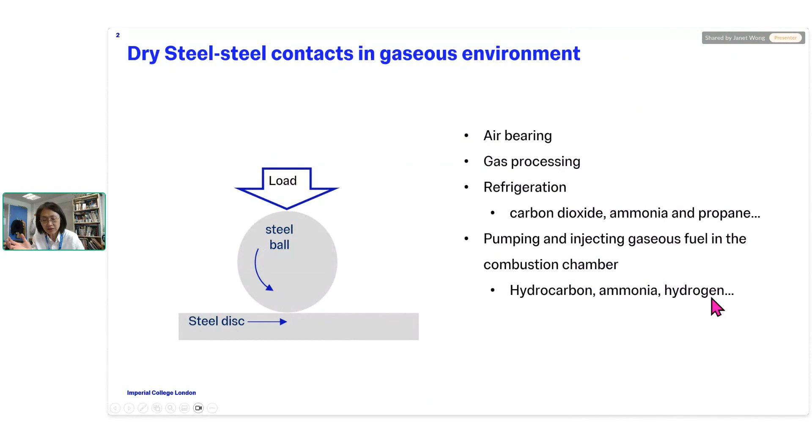A lot of us here probably are familiar with the use of lubricant to reduce friction and wear in tribological contact. In some cases, the use of oil is not suitable. Perhaps you're worried about contamination, or your operating condition is of high temperature. So in those cases, you might choose to have the contact in dry condition.

However, even in the case of dry condition, chances are it's not like there's nothing around the contact. A lot of the time, there will be gas around it. It can be air, or you can have your contacts in an encapsulated condition in nitrogen or in argon. But in all those cases, there is a chance that all these gaseous molecules could potentially interact with the surfaces, so we need to understand how this interaction potentially affects the tribology of our contact.

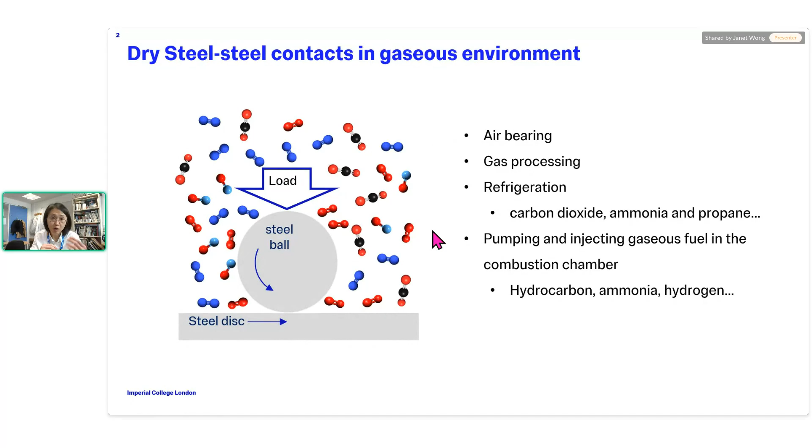So here is just some examples of why the gas environment may be important for tribology. For example, you might be dealing with air bearings, or you are in gas processing. Refrigeration is obviously an important scenario for that. And some of us here may be looking into the use of hydrogen and ammonia for internal combustion engines. In those cases, again, the effect of gas and its interaction with the surface is of importance when we care about the tribology of this contact.

So the study of how gas interacts with surfaces is not new, it has been around for a while, especially if you talk about gases such as oxygen and dry air. Obviously, if you are focusing on steel, we all understand why air and oxygen is important, because you create oxide as a result of that. So the literature has shown that, depending on the oxygen content, your steel contact could have better or worse friction and wear, but it also depends on the material property of the steel as well. For example, hardness is one important property to consider.

Other gases, for example inert gases, have been studied a lot. For example argon and helium—most of the work has shown that they are not beneficial in terms of reducing friction. Hydrogen is also one gas that has some study, and because of the reducing nature of hydrogen, most work has shown that hydrogen is not good for friction and wear.

In terms of nitrogen, some work shows some reduction in friction and wear. There is some speculation that it is because of the production of nitride on metal surfaces in a nitrogen environment, but the evidence here is a little weak. That's basically a conjecture of why nitrogen could potentially be helpful.

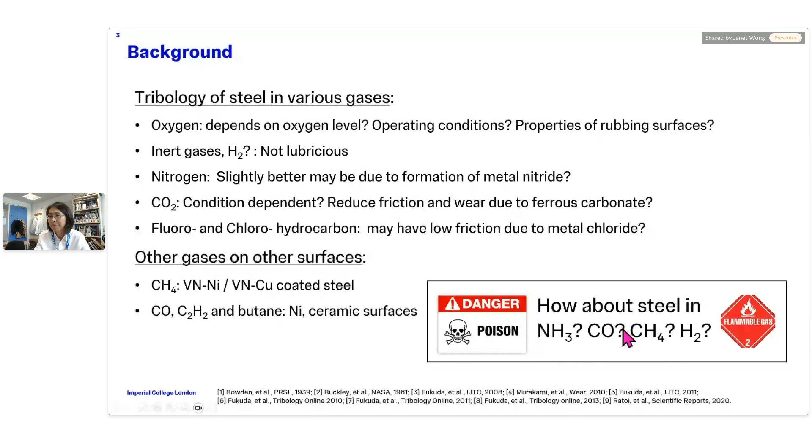So how are we going to run experiments on these gases so that we have a good understanding of how our contact would behave in this condition, but do it safely? Luckily, we work with PCS very closely, and when we spoke to PCS about what we want, they actually came up with a solution. The idea is actually quite simple.

They have a machine called the high frequency reciprocating rig. In a nutshell, what it involves is just a sphere in reciprocating motion, pressed and rubbed against a flat disc. With this contact, what happens now is that we put this in a stainless steel enclosure.

This stainless steel enclosure basically allows us to inject gas into the barrel, to make sure that now the rubbing contact is completely submerged in the gas that we want it to experience.

The important thing here is that the vessel has an internal volume of only about 20 milliliters. So you can imagine that even if we're dealing with a relatively dangerous gas, the volume of gas we need to deal with is relatively small, and the whole machine is quite compact. We can put the machine into a fume hood, and we only need to deal with a very small amount of gas.

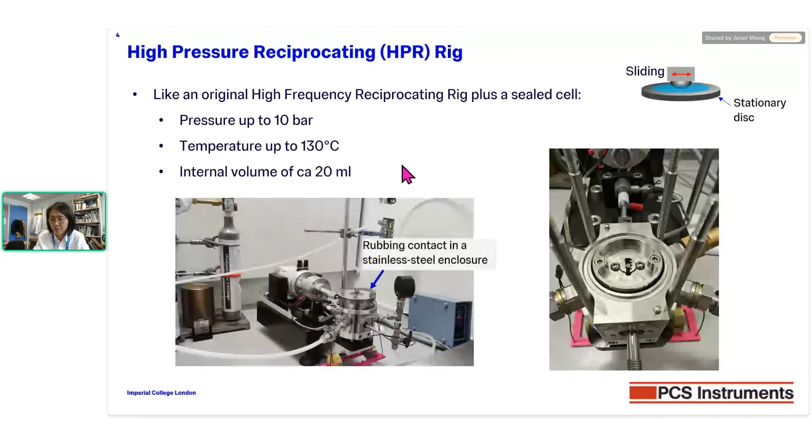That's actually what allows us to run these tests in hydrogen, ammonia, or methane relatively safely. This machine also allows us to run experiments up to 130 degrees and 10 bar. But for the results I'm going to show you, we're just going to do it at room condition—room temperature and 1 bar. So we are going to look at the effect of the gaseous environment on the tribological behavior of steel-steel contact.

So here is the test condition that we use. We try many gases here, because this is for us more like a scouting exercise to understand what gas is actually more beneficial and what gas isn't.

So I grouped the gas into two groups. The first group are the more conventional candidates: air and oxygen, with the inert gases nitrogen, which is relatively inert, and hydrogen, which is reducing. Then there are also some gases that we think potentially may be interesting, for example ammonia, carbon dioxide, and carbon monoxide.

The other group of gases here are all hydrocarbon gases. So you can see that here we have a group of saturated hydrocarbons, from very short chain - CH4 - all the way to a slightly longer chain. In this case we have 4 carbons, so you have 1, 2, 3, and 4 carbon chain length, and they are saturated.

And here we have hydrocarbons which are not saturated - unsaturated carbon. So we have this, which is a 2 carbon molecule but with 1 double bond. This is a 3 carbon molecule with 1 double bond, and then you have one which has a triple bond, but two carbons. So let's see how these gases behave.

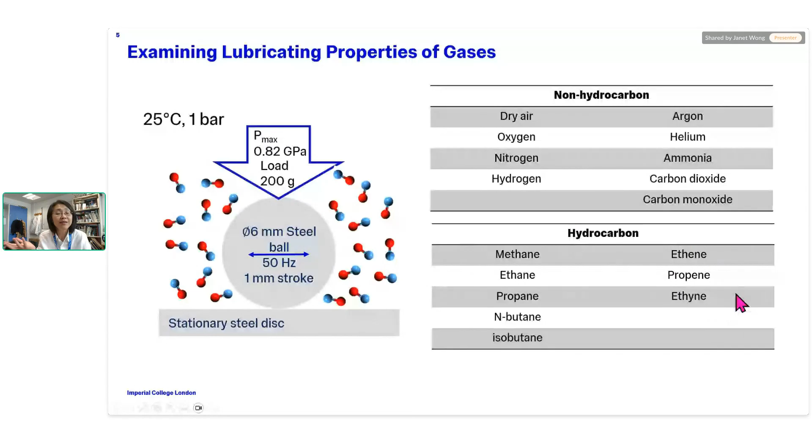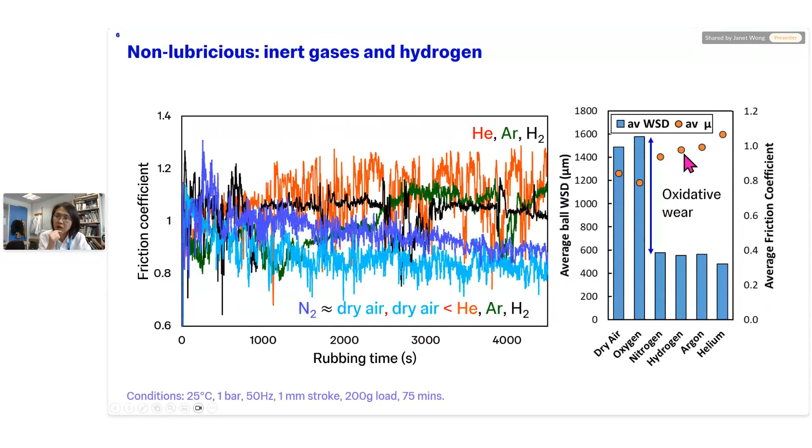If we look at the amount of wear, shown in the bar chart, let me explain what it's showing. The orange dot here is basically the friction coefficient, and the blue bar is the average wear scar on the ball. The larger the wear scar, the more severe the wear is.

You can see that all these gases have similar friction coefficient, but the ones with dry air and oxygen have slightly lower friction coefficient as shown in the graph. But for the wear, you can see that now for oxygen and dry air, you get much higher wear. That's basically what you would expect at high oxygen condition - you get much more severe oxidative wear. That's why, despite the fact that their friction coefficient is all around 0.8 to 1.2, when there is a large amount of oxygen, your wear is way more substantial compared to when you're in a more inert condition.

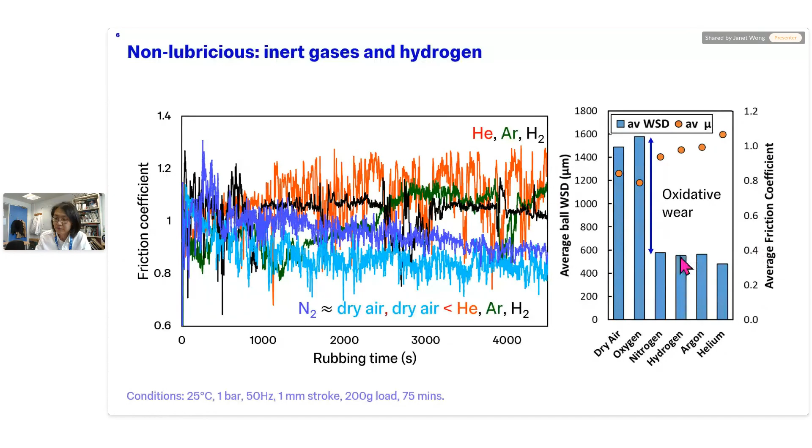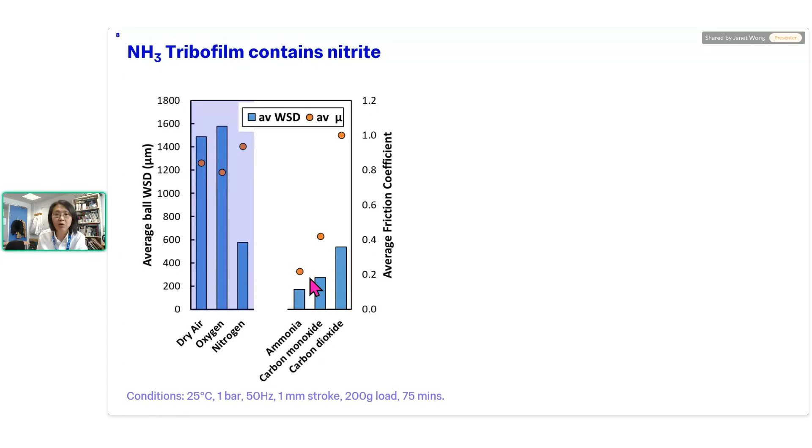So why? If you look at these numbers, it would have suggested that these gases must interact with the surface, potentially forming some protective film, and that's why we can have low friction and low wear. So what we did is perform XPS to find out what the chemistry on the surface is. This method allows us to look at the top 10 nanometers of the surface.

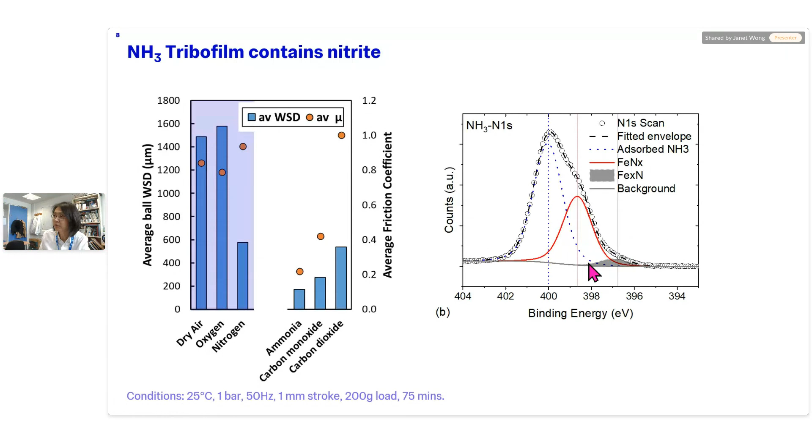So now that we have some idea that a film has formed on the steel surface when it's exposed to ammonia or carbon monoxide, perhaps you might wonder, how strong is this film? Is it going to stay forever, or is it sensitive to the environment it experiences?

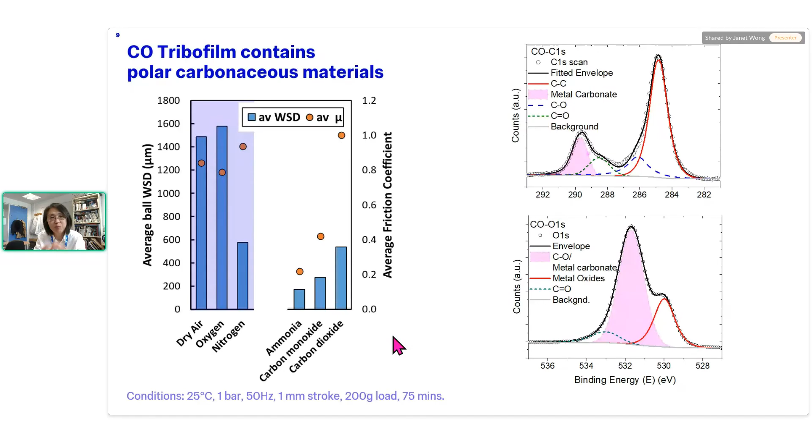So in order to find out how robust this film is, we're going to take advantage of the fact that HFRR has this chamber which only requires a very small amount of gas. So what do I mean by that? We are going to do a gas switching experiment.

Because the volume of gas necessary for HFRR is so small, that basically means I could flush the chamber with, let's say in this case, ammonia. And then once the friction is low, so I know the film has been formed already, then I can flush the chamber with nitrogen. And then I can see how the friction coefficient changes. The small volume involved means the switching takes about 10 seconds for the whole chamber to be completely flushed out of the original gas.

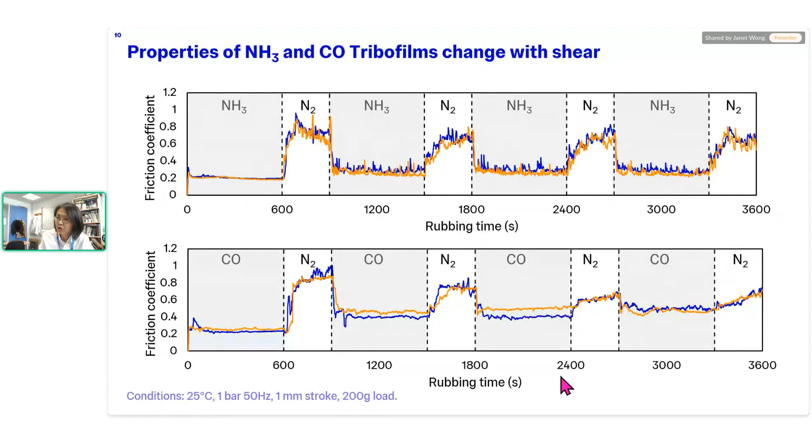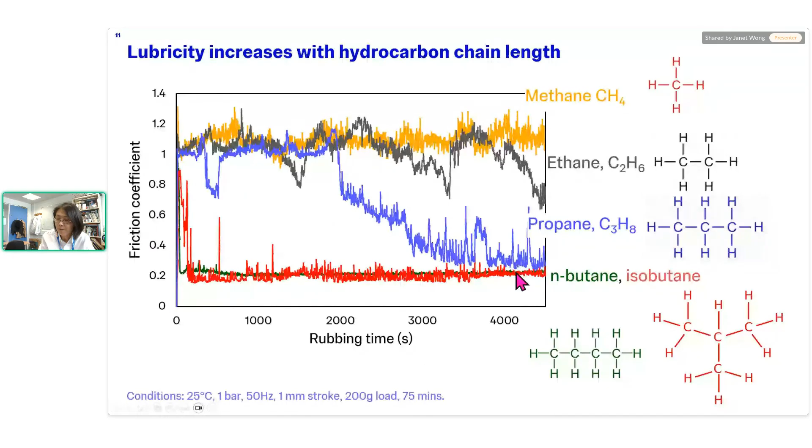And I think now with this trend, we can all guess what happened when we have 4 carbons. In the case of butane, we have tried 2 different structures. It really doesn't matter which structure you pick, both of them actually give very low friction coefficient, and the film forms very quickly. It takes less than 100 seconds for this film to form, and it is stable within the experimental time frame.

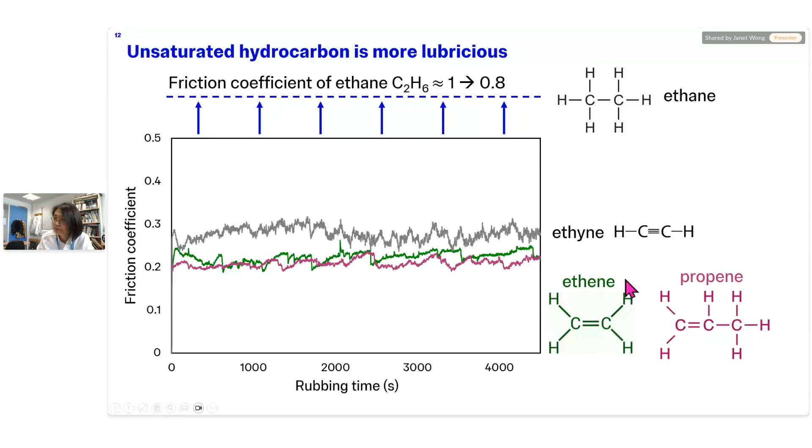For this particular film, it seems like it is good for friction. If we look at the wear for the few hydrocarbons we've tested, friction and wear seem to be correlated—those with low friction tend to also have lower wear. Here's the most interesting few: those that are unsaturated and those that are long-chain saturated hydrocarbons all have low friction and low wear.

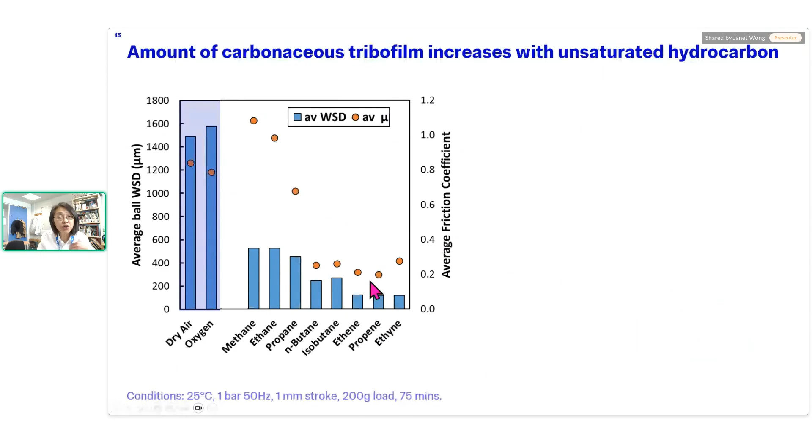So to have one hour of low friction, the film has to be formed and removed continuously during the whole rubbing process.

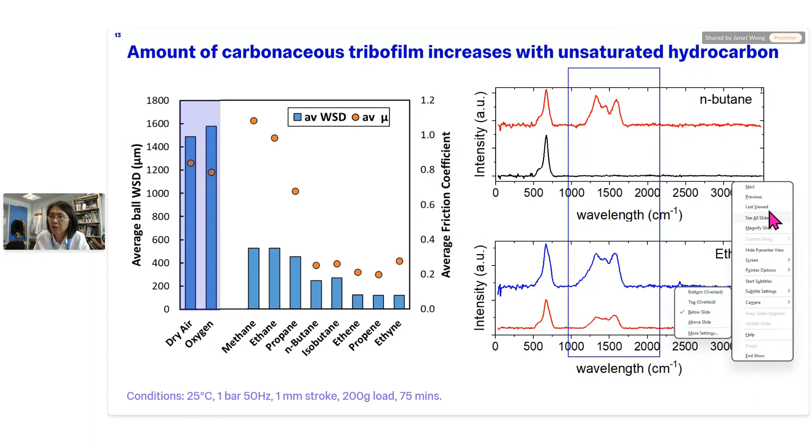So we're going to do the switching experiment again to work out the properties of this film. I'm sorry, it has frozen. Okay, so we're going to do the switching experiment again.

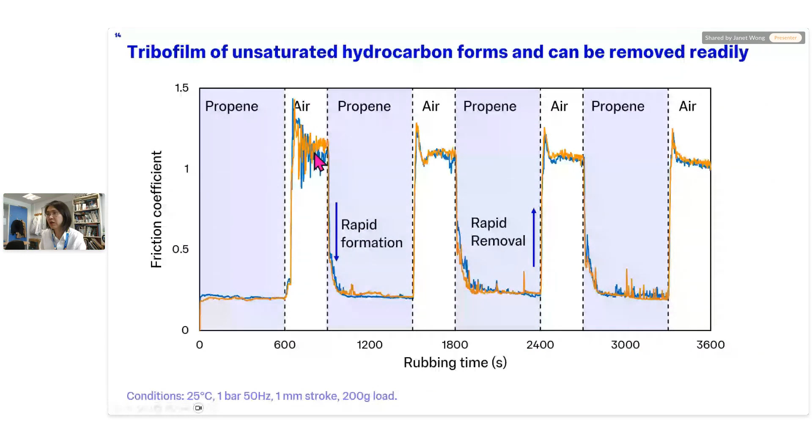It's almost like when this film is formed and exposed in nitrogen, it actually becomes stronger with time during rubbing. This suggests that, compared to the propene-air switching I just showed you, oxygen plays a very important role in removing this carbonaceous film formed in propene—and this matches what we found in our earlier work looking at hydrocarbon oil as well.

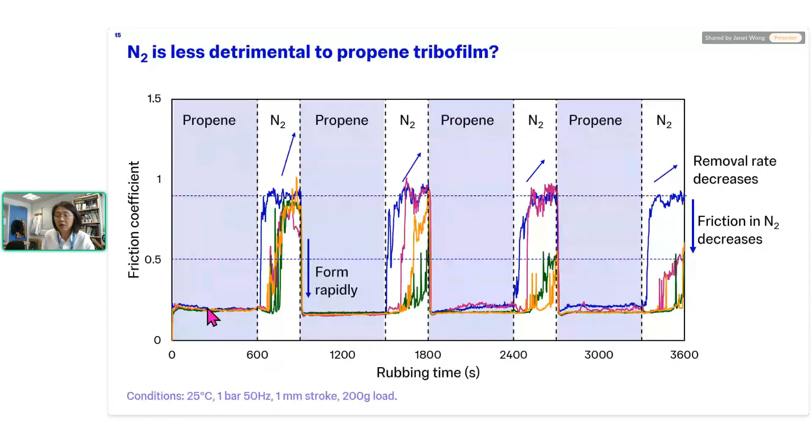I mean, maybe, but you may not want to do this. So how are we going to use this information? I'm going to show you an example of how we can use this information.

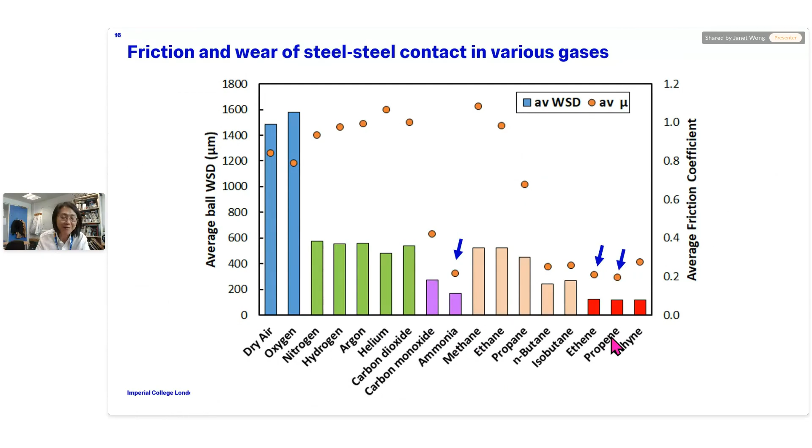We are going to use this knowledge from that piece of work on a scenario where our contact will see hydrogen. There's now a lot of work focusing on the use of hydrogen for IC engines. So here is an example of how it may look like, and in these cases, the pump and the injector will need to be lubricated.

We have shown you that hydrogen is actually not good in terms of steel-steel contact. We know that hydrogen gives very, very high friction. That basically means that if my contact is going to see hydrogen, I need to do something to reduce the friction, otherwise the pump will seize, and that's the end of the story. The previous work showed that some gases actually can be potentially lubricious.

So what if we could add a little bit of this lubricious gas into hydrogen so that it acts kind of like an additive? Therefore, my rubbing contact will work in hydrogen. So this idea of using gas as an additive is not new.

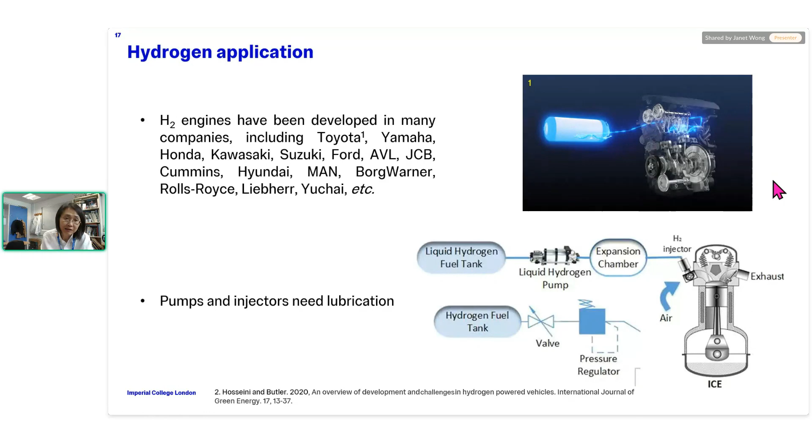This idea has been called a different name previously. Some of us may be aware of a lubrication strategy called vapor phase lubrication or gas phase lubrication. The idea is quite simple: you have a gaseous molecule that is lubricious, and you use a carrier gas to bring the lubricious additive to your contact.

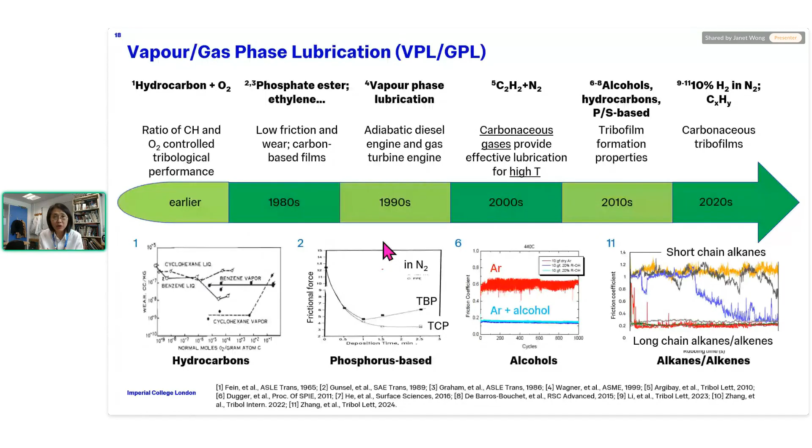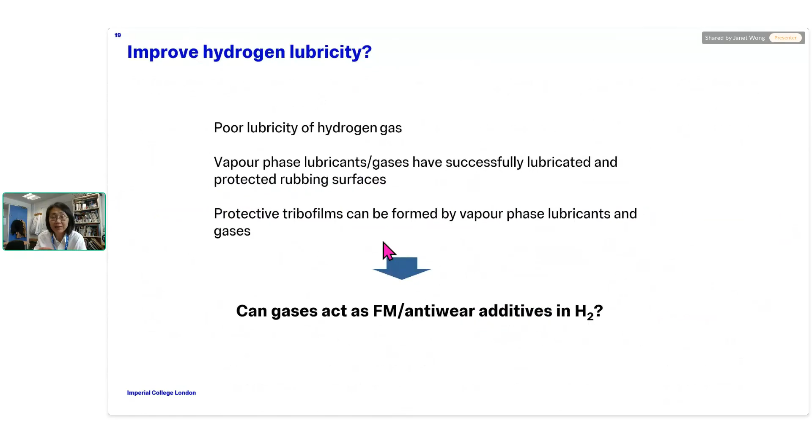So we would like to use this as an opportunity to find out if we can use a lubricious gas as an additive to lubricate contact that is surrounded by hydrogen.

So these are the gases that we try as the additive. The choice here is basically guided by the piece of work that I've just shown you. We already know that the unsaturated hydrocarbon works quite well. We have seen that ammonia possibly could work quite well.

Other choices, for example like the amine, we picked because we know that amine can interact with steel quite strongly based on our research on friction modifiers and stuff like that. And also it depends on whether we can find this easily. So anyway, these are the choice of additives that we tried.

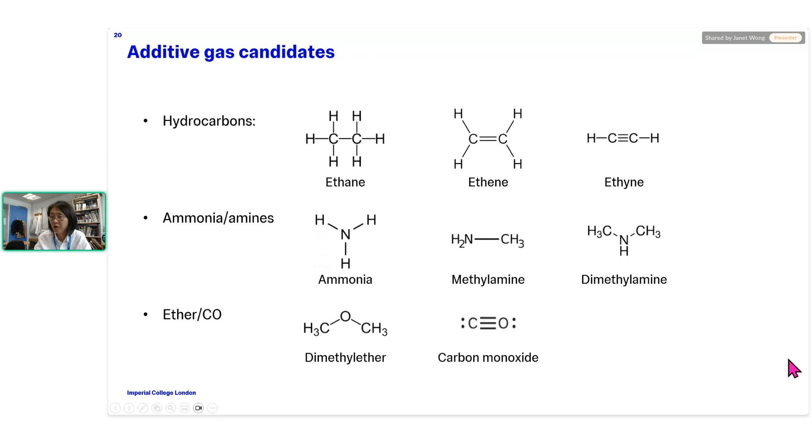In order to do this experiment, now we need basically two gases getting into the chamber. One of the gases is hydrogen, and the other gas is basically what allows the additive to be added. So they are mixed in advance before they get to the test chamber.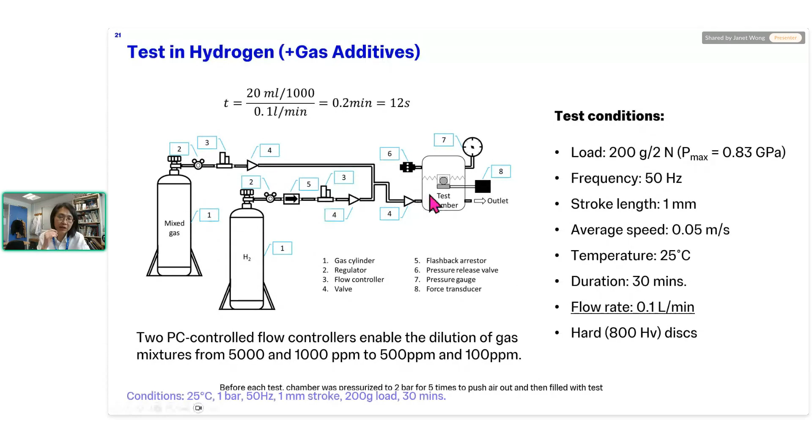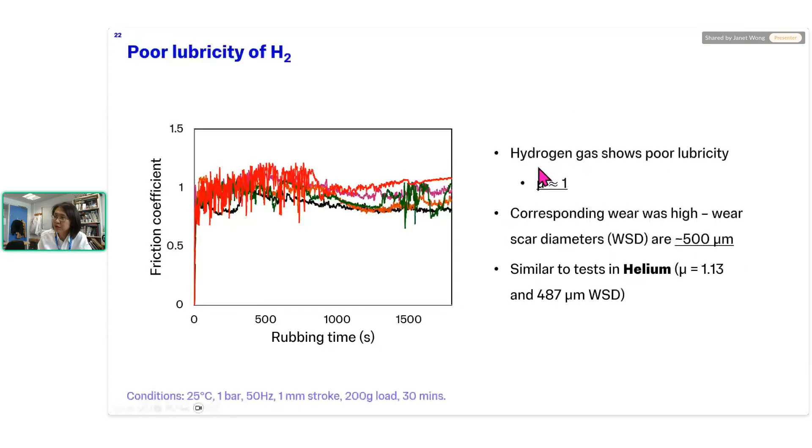So here is just a reminder that hydrogen doesn't do well for steel contact. We can see again that the friction coefficient is very high. But now let's look at what happened when we use carbon monoxide and dimethyl ether as an additive. You can see that for carbon monoxide in this case, it actually doesn't work, even though in our previous work it does show some effect if you have 100% carbon monoxide.

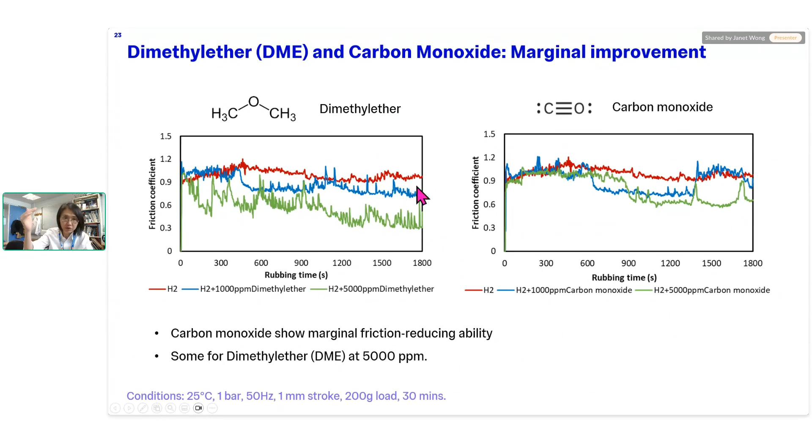In the case of dimethyl ether, if you have a relatively high concentration of it, you can have a reduction in friction. However, as soon as you reduce the amount of the lubricious gas or gas additive, you can see that the beneficial effect goes away. Now you have a friction coefficient very similar to what you get with just pure hydrogen.

So with the unsaturated and saturated hydrocarbon, this is exactly what you'd expect. Based on what we have just discussed, the saturated one has no effect - whether you add it or not, you get a high friction coefficient. However, when you have the unsaturated one, which we know is more reactive than the other, you can see that the friction coefficient is very low, even if you add 5,000 ppm into the system.

If you reduce it to 1,000 ppm, you can see that for ethene, it actually struggles and has no beneficial effect anymore. However, you can see that it struggles initially, but eventually it forms a film. So you can get some benefit even with 1000 ppm, but higher concentration gives you a more robust performance.

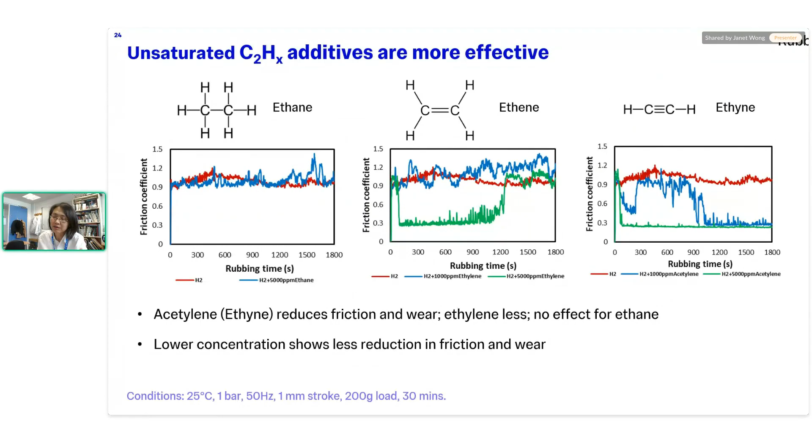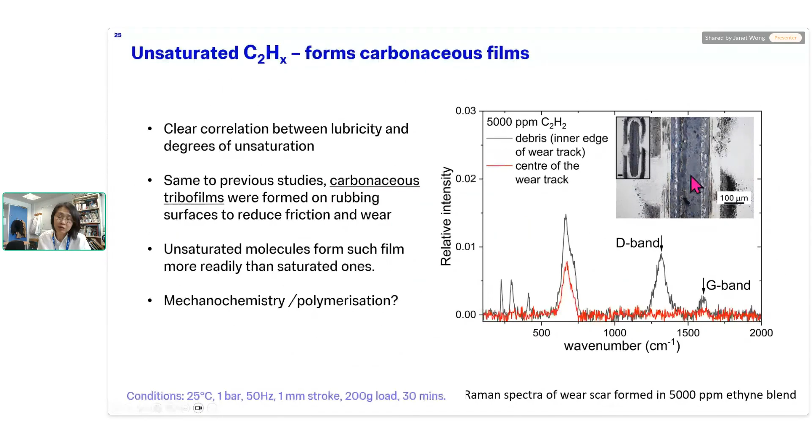So you may wonder, now that we only have a small amount of this additive gas in the system, does it mean that the chemistry of the coating has changed? Here is just to show you that it didn't change. Despite the fact that we now have a mixture of ethyne and hydrogen, the chemistry of the protected film on the surface is the same. It's still carbonaceous based.

For ammonia, you can actually have good friction reduction results. Even in the case of 1000 ppm, your friction is low. However, when you drop to 500 ppm, the benefit is only marginal.

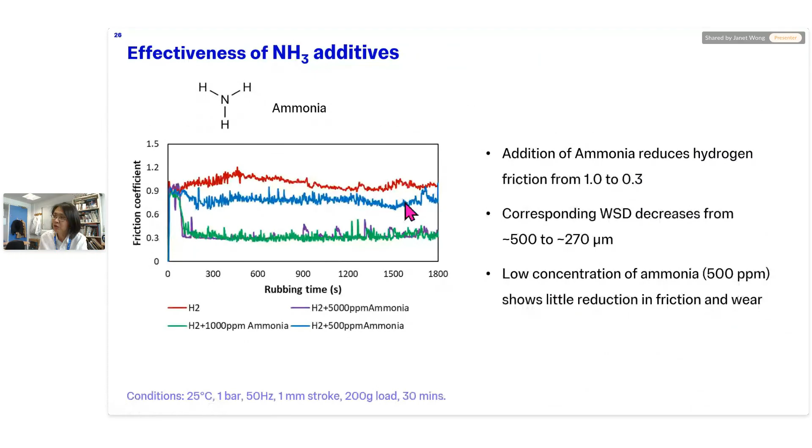So if we look at the amine gas, as I said, amine is chosen because for those working on friction modifiers, we know that amine in oil is a good friction modifier. So we thought perhaps in gas it will work as well. It actually worked as expected.

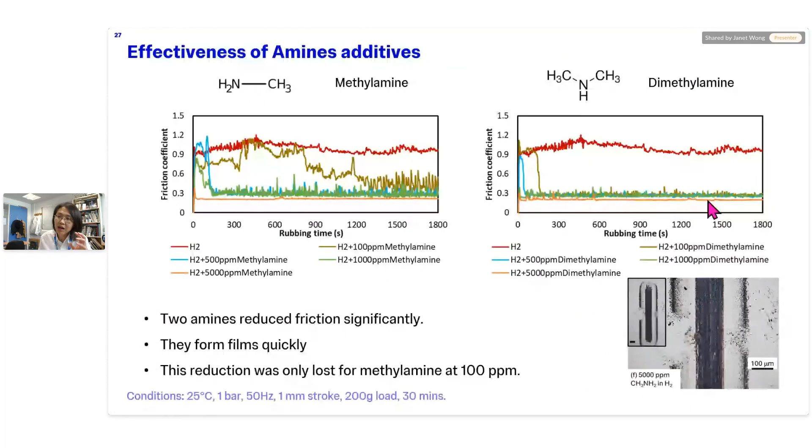Look at these two amines, especially dimethylamine. You can see that even when you only have 500 ppm - that's the line in light blue, covered by the other line - it works. And even with only 100 ppm, the light brown line, it still works. So even with such a low concentration of additive gas, your contact remains experiencing low friction.

We can look at the surface again, and we can see that despite the fact that you only have a very low amount of additive gas in hydrogen, the chemistry of the tribofilm on these surfaces is very similar to what we've seen with 100% ammonia gas. So the chemistry of the surface doesn't seem to be much affected by the concentration of the additive gas. As long as they can form a film, the chemistry is more or less the same.

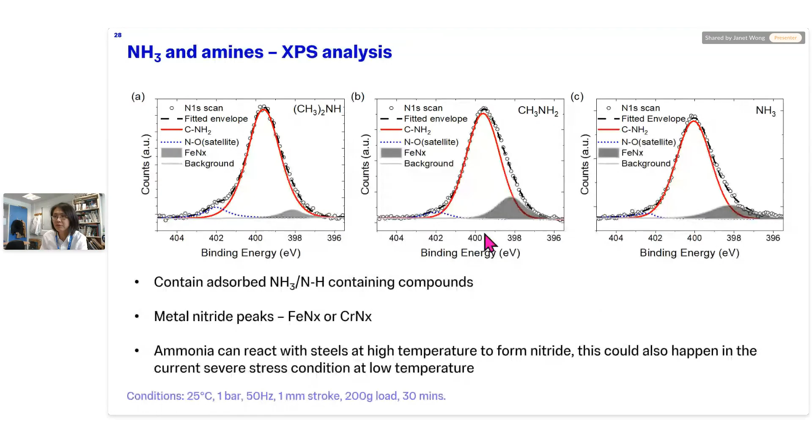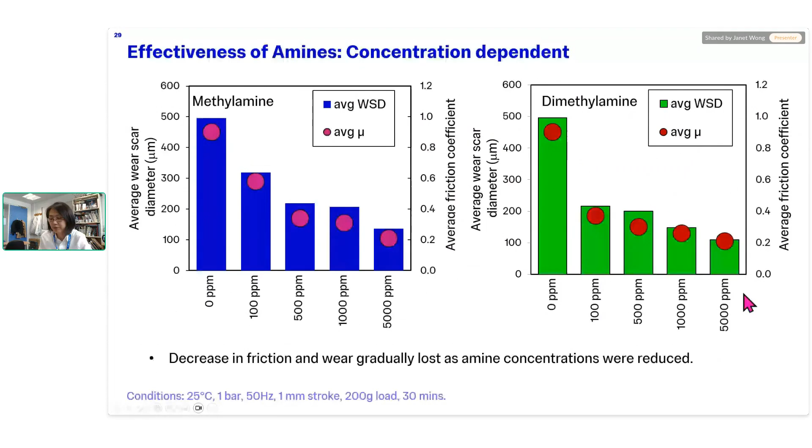So here is just to highlight that, again, the amount of additive gas, if you use amine, doesn't really need to be a lot. 100 ppm is what you need - you already see a very strong effect. Anything above it, you will still get some benefit, but it's marginal improvement. So finally, I'd like to conclude.

I hope you are convinced that the atmospheric environment the tribological contact experiences is actually very important in terms of whether it will experience high friction or wear. We have also seen that if the gaseous environment itself is not good for your contact, there are ways to mitigate it. Some people may choose to use coating, but here we give you an alternative.

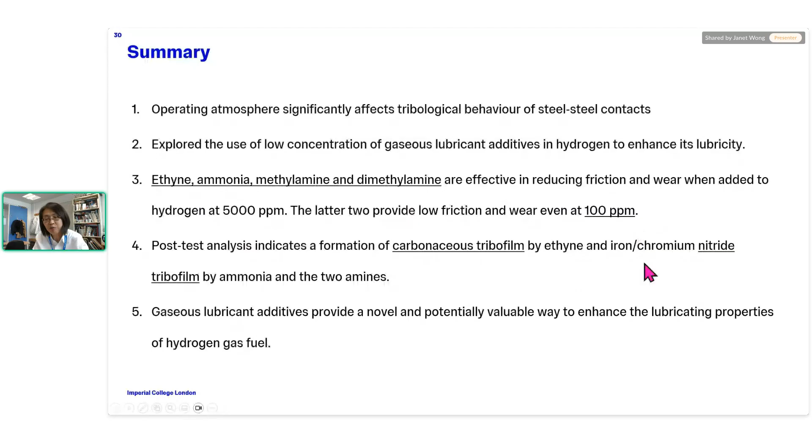You might be able to use an additive gas which is lubricious, and by doing so you can reduce friction and wear. We have also identified some potential lubricious additives you can use, and for amine, in the case of hydrogen, the amount you need is actually very, very small. So with that, I would like to stop, and I'm happy to take any questions. Thank you.

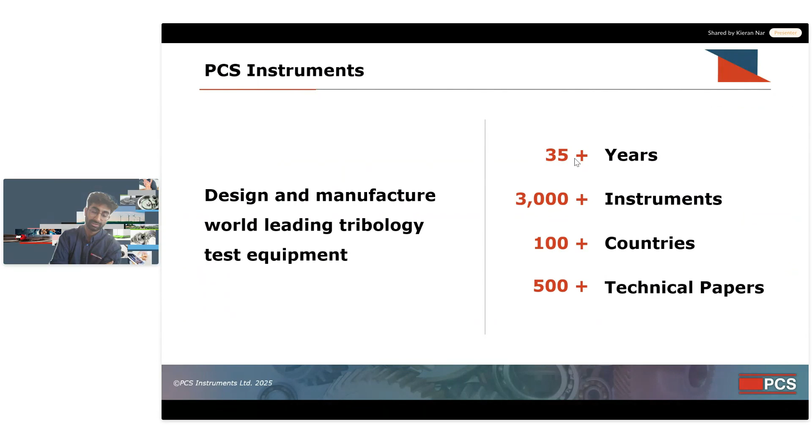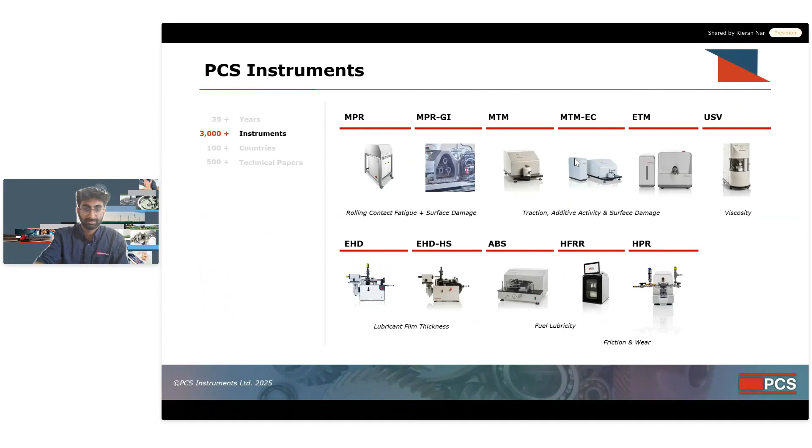But the two solutions that I'm going to focus on today, and that I think will be highly relevant to those interested in the tribology of alternative environments or atmospheres, are the HPR, which Janet did a great job of introducing, and the MTM-CC. The latter is a brand new accessory to the MTM and MTM-EC that enables rolling sliding contacts to be evaluated within a climate-controlled chamber.

I believe this is the first public mention of the MTM-CC, so this new accessory is very much hot off the press and one that we are very, very excited about.

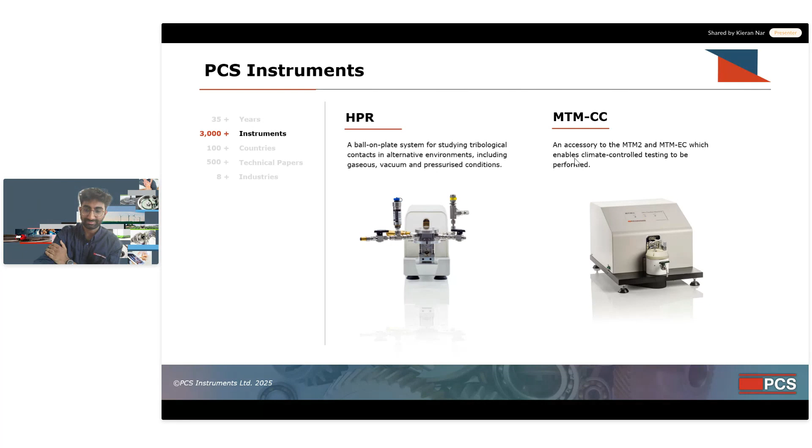Starting with the HPR first, yes, Janet did a fantastic job of introducing this rig and has done some fantastic work on it with her colleagues at Imperial.

As you can see here, the HPR advances our well-known and highly trusted HFRR instrument to include a fully sealed chamber in which fully automated high-frequency reciprocating tests can be performed within gaseous, vacuum, and/or pressurized environments.

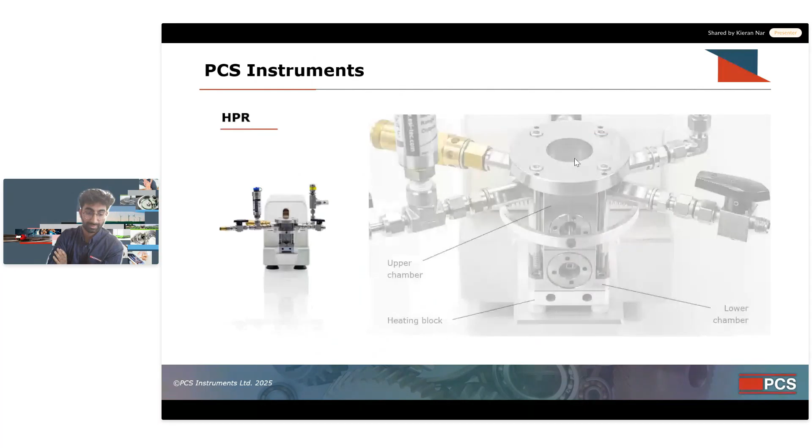This fully sealed chamber comprises an upper and lower section, which both sit on a heating block. And just like the HFRR, we apply a static load by hanging weights from the halo type structure around the upper chamber section.

As you can see here, we have multiple fittings that connect the sealed chamber to the mechanical unit. More specifically, these include a gas inlet valve with a digital pressure sensor, so that you can monitor your pressure values within the PC software, a gas outlet valve, plus a burst valve and a pressure release valve.

We've taken immense care to develop an instrument that is safe to use within a lab environment. As highlighted here, the HPR includes multiple software and hardware items to ensure that pressures can never exceed dangerous levels.

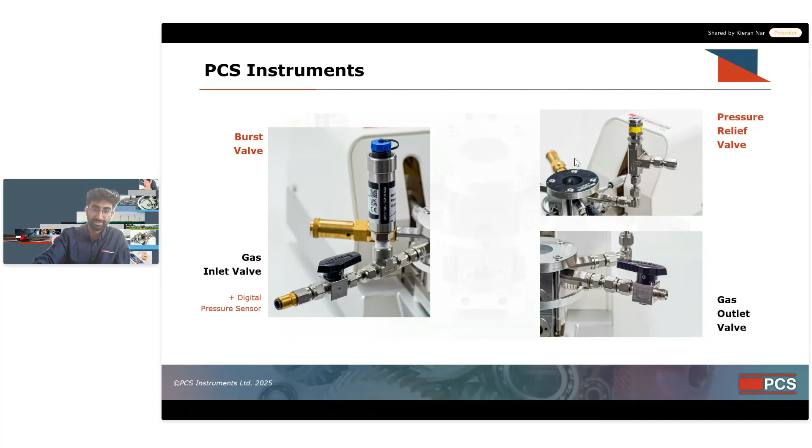This upper chamber section cleverly utilizes a stainless steel bellows system, which connects the upper specimen holder to the vibrating mechanical unit, enabling a reciprocating motion to be performed.

Additionally, we've taken great care to ensure that even when testing under pressure, the specimens will not be affected by this and will remain in the correct vertical position, and the desired load will be applied consistently throughout testing.

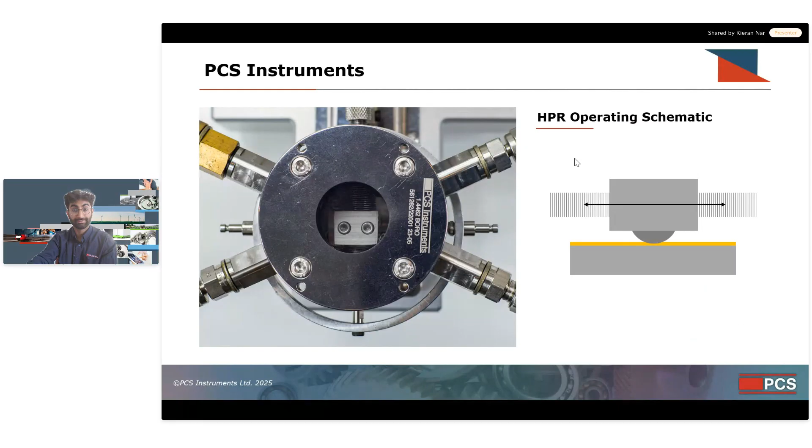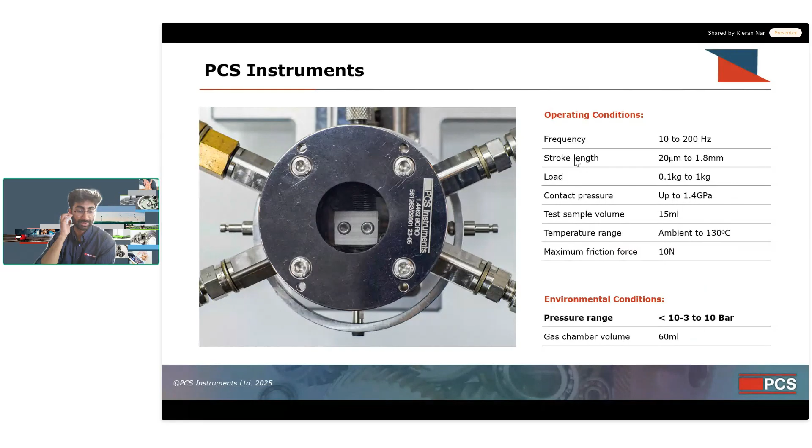As this tech spec shows here, we have mostly been able to match the operating conditions of the HFRR, whilst also allowing vacuum to 10 bars of pressure to be applied.

Another great feature of the HPR is the ability to remove the pressure chamber from the instrument. This allows ball and disc specimens to be fitted to the upper and lower sample holders, away from the instrument.

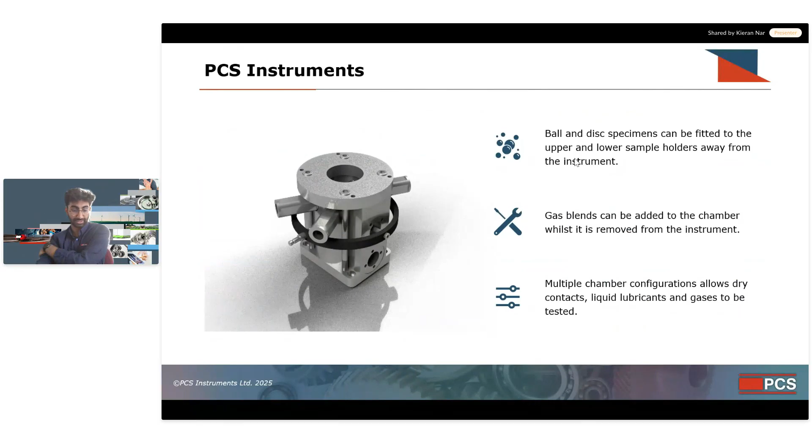It also means that gas blends can be added to the chamber whilst also away from the instrument, resulting in much finer atmospheric control. There are also several configurations of the chamber which allows dry contacts, liquid lubricants, and gases to be tested in a very flexible way.

It's still very early in the life of the HPR. It's incredible to see some of the fascinating research being carried out by Janet and the team at Imperial, as well as various different institutes around the world.

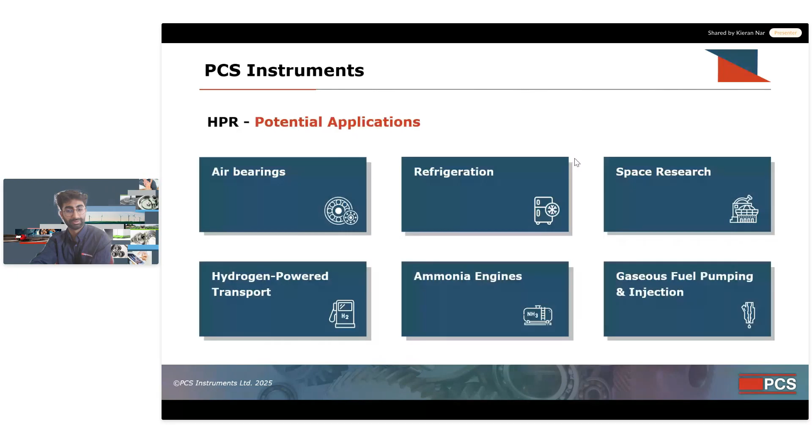It's also very exciting to think about the possible applications where the HPR could also be incredibly valuable going forward, such as the ones listed here.

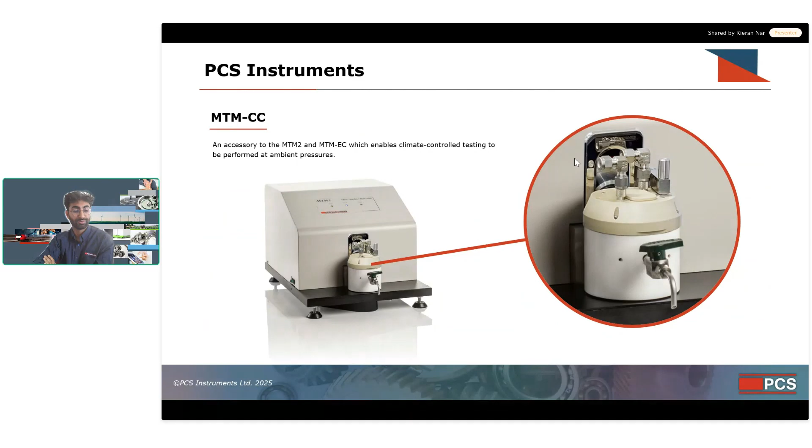So moving on to our newest featured accessory, the MTM-CC. This is a climate-controlled upgrade to the test pot, which enables tribological effects of gases to be studied within rolling sliding contacts at ambient pressures.

The MTM-CC features standard size inlet and outlet ports, which allows a controlled flow of gas through the MTM pot. We've ensured to use high performance materials like Kalrez and fluorosilicone seals for maximum gas compatibility, as well as a highly flexible ball shaft seal, which we like to call the lollipop seal. This prevents leakage without importantly affecting traction measurements.

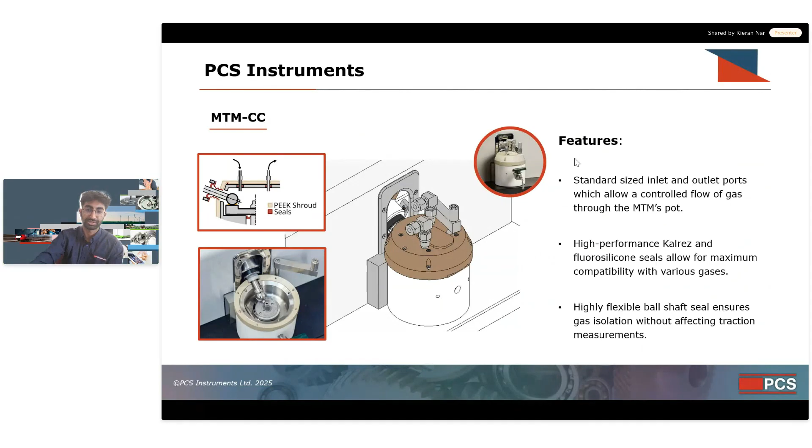This new accessory opens up a realm of new testing capabilities for existing and potentially new MTM and MTM-EC users, including the evaluation of lubricant performance under controlled environmental conditions, friction and wear in inert and reactive environments, the lubricity of gases under dry or lubricated conditions, as well as some of the great work that Janet's been doing on the impact of gaseous additives to frictional performance.

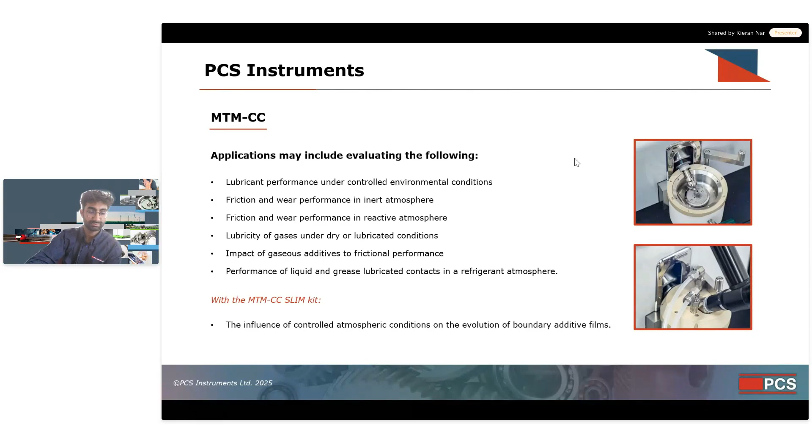Additionally, we've made sure that the MTM-CC can still be used with the SLIM mapper, so that the influence of controlled atmospheric conditions on the evolution of boundary additives can be studied. And more generally, we've worked very hard to ensure the MTM-CC is compatible with as many of the existing and most popular MTM accessories and features. Some of these include the SLIM mapper, as I just mentioned, the EC module which enables electric potentials to be applied to the contact, cooler low load kit for testing under 10 newtons, and reciprocating kit for oscillating movements, etc.

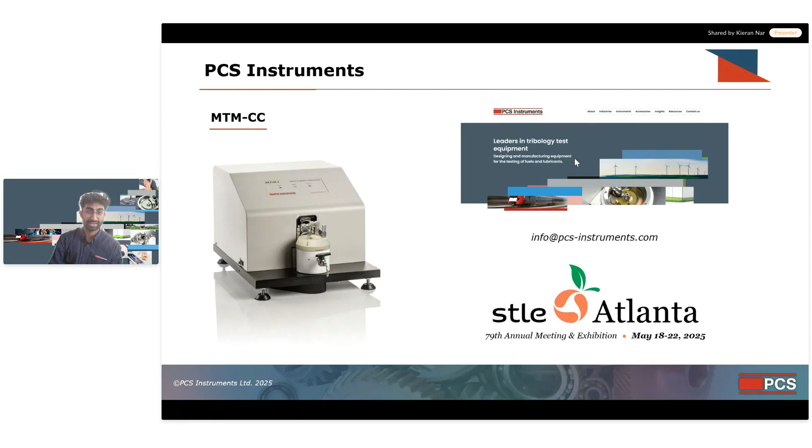Fantastic, thank you very much, Kieran. Yeah, really, really interesting looking capabilities on the equipment. So that's great to see.